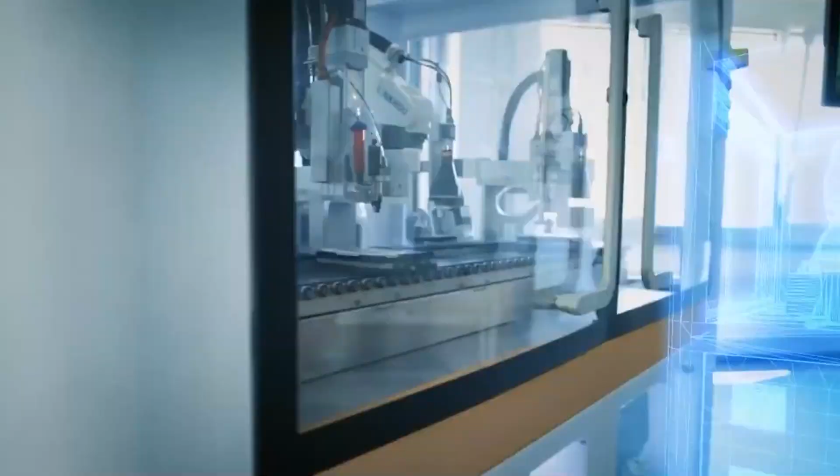Thank you so much for the tour. We can go to the presentation.

Mostly with my experience working with a lot of MSMEs, I have found there are three major challenges which are commonly observed when MSME has to adopt a new technology.

The first challenge is time. There are a lot of things which are parallelly going on, a lot of things which a single leadership or very few people have to handle. So time is a big constraint to look at these technologies for their future progression. That is one area of concern. Second is the knowledge and understanding.

We are trying to enter a new technology. We want to introduce it in our present processes and present production line. We may not be knowing the entire knowledge about how to apply it. So that is another challenge why we normally keep it not in our priority list, but a little back.

And the third challenge which we are finding is the cost. When you apply such technologies, you always have this perception of how this initial cost of investment will help you. So we have done certain case studies in the past where we engaged MSMEs to do certain solutions through us, and we could see there is a lot of benefit they got after applying the technology.

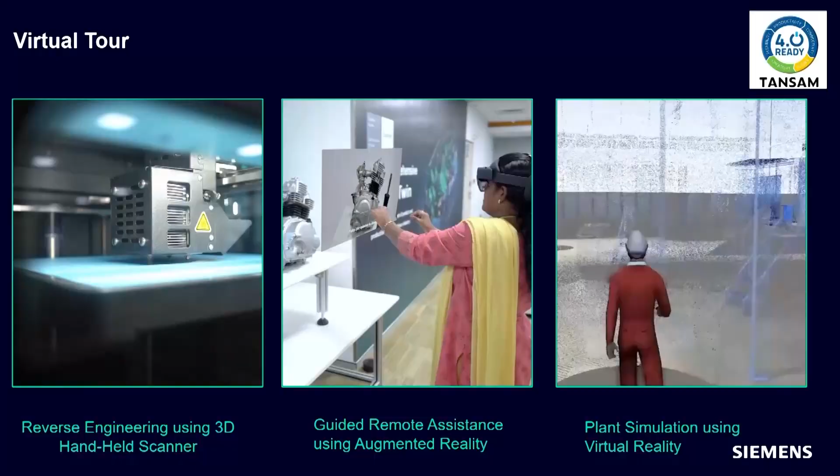This is our reverse engineering infrastructure. I've shown in the video we have a metal printer. I'll take you in detail for that. We have infrastructure on augmented reality.

This has a major impact when you are bringing a machine from outside, but then you are burdened with the AMC cost. So that AMC, if you can work out some solution where you can be guided to do maintenance, whether a person knows that technology or not, you can apply such solutions in your factories and it can reduce your existing cost of AMCs.

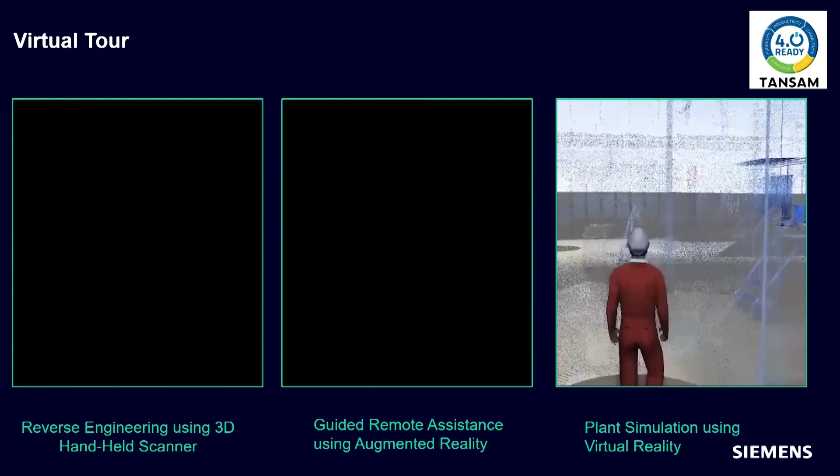And then you have something called plant simulation. Your new projects, your existing plants can be brought to a simulated environment and can be then optimized.

This is the infrastructure which we have from Siemens, and this is first of its kind. It is the first industry Center of Excellence. I have been heading other centers which are more academic in nature, but this is the first industry center of excellence because of the capabilities it owns.

Before this, they only had this in China. Now it is the first one located very near to you. It is in TIDEL Park. What we have as a mandate with us, I must share that with you.

One is that we are enabling, as in we are bringing the infrastructure to you. If you want to set up some infrastructure, you can take help of TANSAM and we can get that infrastructure done for you if you are new to that. Second, we are helping you in managing those infrastructures also. We are setting up spokes.

Spoke is where TANSAM acts as a hub, and we can partner with you to implement that infrastructure within industry. Then we are also your implementation partner.

We are helping those programs which are on Industry 4.0. We are training people on 4.0 programs. I have been meeting people who have this challenge that although they are interested, they don't know how to use it. So we can give you some skill development around it.

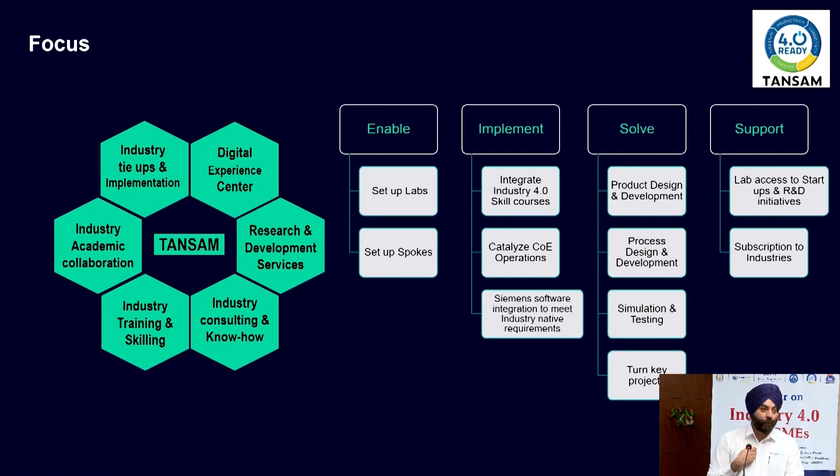We have that infrastructure to support. We are also catalyzing your COE operations. If you already have a center of excellence there and you are not able to operate it, we can support you there also. We can also support you if you have Siemens infrastructure anywhere, but you are not able to integrate it with your native requirements, we can do that also for you.

So these are all the solutions you can get through TANSAM. We can provide you solutions on product design and development.

Any requirement you have on product design development, you can give it to our team. We have a resource team who is already experienced in industry and who understand these tools, and they can give you solutions around it. We can also support you with any process design and development.

If you are new to any process, you want to introduce any process, you want to automate any process, you want to simulate any process, we can help you achieve that also.

We can do any simulation and testing for you. If you want to monitor any structural analysis, you want to perform any fluid flow analysis, you want to perform any particular testing, we can do it by using these softwares.

We can also help you with solutions towards turnkey projects. You have no idea about how to implement, but you want to implement, you give the entire project to us, we'll help you implement. So that is how we are hand-holding all the industries.

In addition to that, we are also supporting in the way we are doing a lot of R&D activities, and we have started giving lab access to each one of you. If you just want to use the software, you know the software, you can come to us, you can use the software. We can actually give you a per hour kind of usage module for yourself.

So these are the basic understandings with which we are coming to industry. Subscription model is also there. There's an industry who wants to sit there, work for 3 months or 5 months and wants to protect their IPR also. We'll have a sign up with them where we can give you a subscription where your people can sit and work on it.

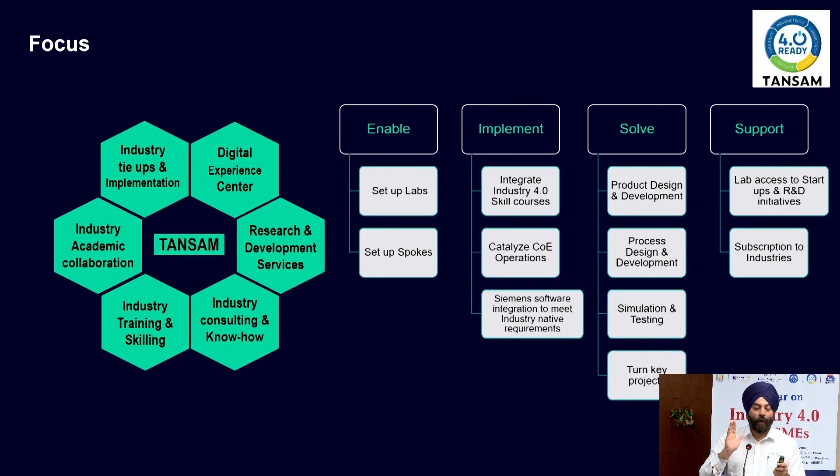All these are possible at TANSAM. What we have as infrastructure, we have 7 centers in that facility. We have named it to meet the domain requirement, Innovative Manufacturing Center. This has largely reverse engineering you can do through this.

Yesterday I was visited by an industry who has a small part which they are importing from China. But now that small part, because of the pandemic situation there, they are not getting it and their production is held up. But there is no manufacturing done in India. They wanted that product entirely to be developed in India.

Mostly they need 30,000 such parts in a month. So what we have done is we are now reverse engineering it. We are making a model from it and we are giving them a prototype and then we'll give them product drawings. That small work will enable them.

That small work will enable them to get 30,000 parts in a month. They'll be able to get it manufactured through India. So that is what innovative manufacturing is all about.

We have a 3D metal printer also. You can print stainless steel at our center. You can print Inconel. You can print tool steel. You can also print copper.

So all these things, you need not do a prototyping in plastic or any other composite. You can print steel directly. So like that, we have that infrastructure.

The second infrastructure we have is the smart factory center, where if you are looking for automation, you need to understand how robotic and automation work. We will show you certain prototypes we are working upon, cobots and robots, which are applied in the day-to-day manufacturing line for their requirements.

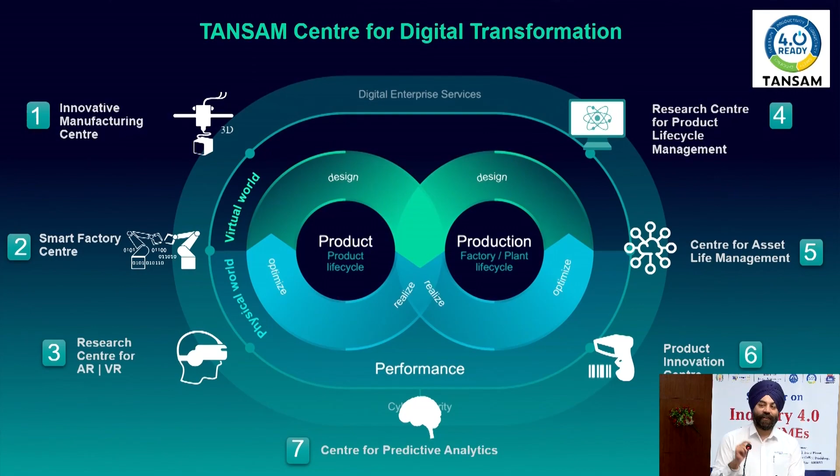Augmented reality has a lot of applications when it comes to remote guidance of any maintenance to be done, any work to be done. Also, you can have an indoor navigation system, like you have an industry and you want a person to move in that and go to each area of your industry.

You can have an indoor navigation system, which we have developed an application for. It is available at a very nominal cost. Likewise, there are a number of applications of augmented reality. Another application you can have is virtual reality, where you can add immersive experience.

Say you have a clientele based out in UK and you want to sell your product, but you cannot take the product and go to UK to market it. What you can do is give them an immersive experience. You create the entire plant process or a model in virtual reality and show them through that, highlighting all the good parts you have. Our team will help you generate those applications as per your requirement. This is that center's capability.

In addition, we have a research center on product lifecycle management. Every product has a life when it enters the industry - you come in as raw material and go out as an end product. You do some CAD designing, then certain processes, then it moves in the plant, then testing happens. Throughout the entire lifecycle there are many softwares and applications involved. Even traceability is a factor - sometimes the line is big and you want to trace what went wrong. All of that you can get through the center, and we help you apply it to your real-time requirements.

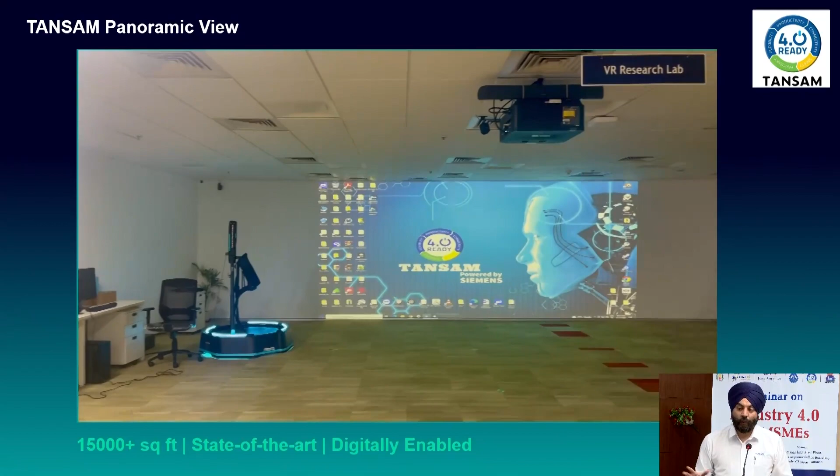This is a small panoramic view I wanted to give just to give you the idea. This is our VR area, where we apply all the applications related to virtual reality. You can bring your clients here, show them what you are doing, and get new orders from here. Then this is our innovation manufacturing area, and behind that is a robotic smart factory area. On the right side we have the AR area.

Then there is a digital lab where we have 100+ systems with all the software enabled, whatever you want - even electronic chip testing, circuit creation and testing, and PCB board optimization, we have software available. You will be amazed to see it. I'd like to invite all of you to come to TANSAM and see the kind of infrastructure we have - it's a world-class infrastructure meant for MSMEs. You come there, use it, and try to build up your own digital enterprise.

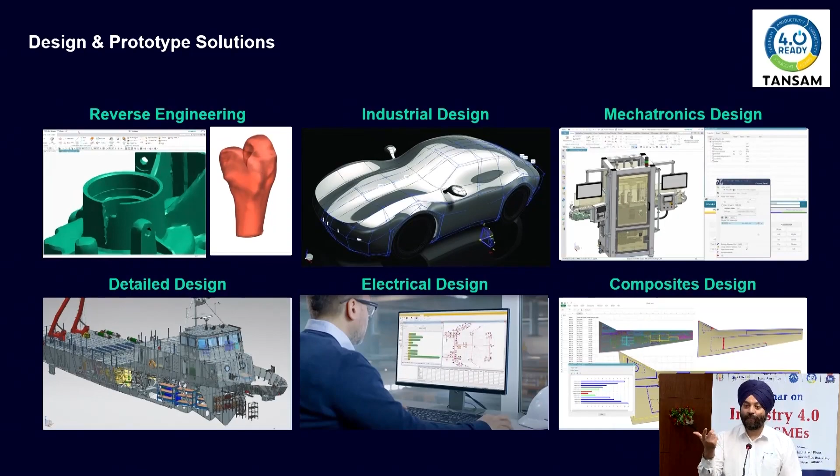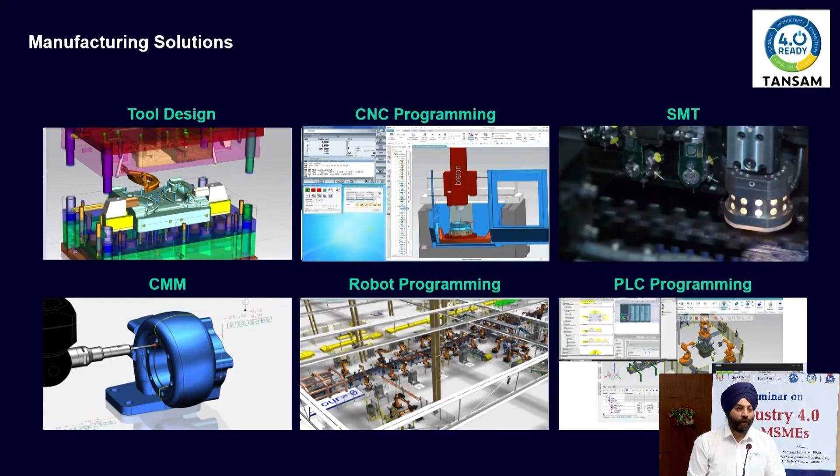This is our reception, conference and training rooms, discussion areas, and meeting rooms, and we have some labs working with us. I've already referred to reverse engineering - there are people here who have given me tasks for small projects on reverse engineering, and I have done that for them, they already know. Then industrial designs, mechatronic designs, detailed designs, electrical designs - all of these you can get through us. Tool designs, CNC programming, SMT, CMM, simulation, robot programming, PLC - these terms are not new to you, I just wanted you to know you can get this from us.

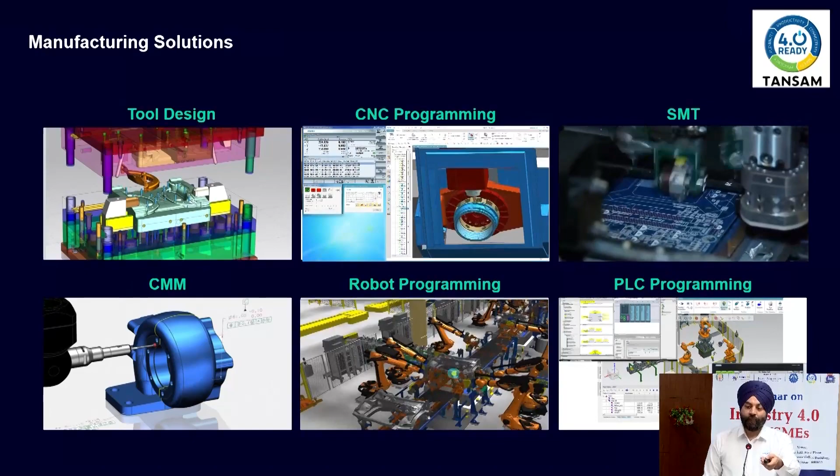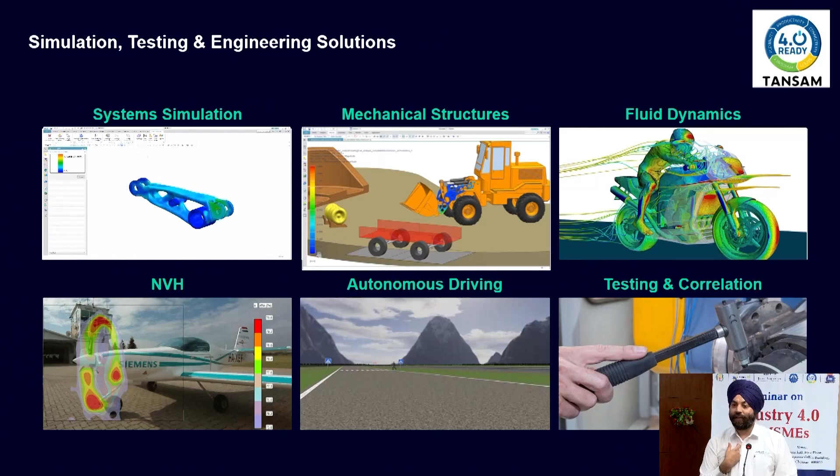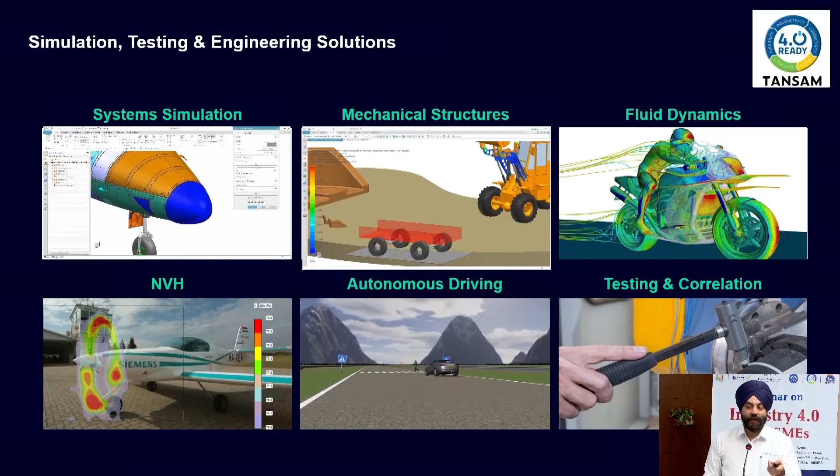System simulation is very interesting. I was talking to some people in Trichy and they said this is a huge requirement with them. We need to simulate certain fluid flow dynamics, check requirements in aerospace and defense. If you're dealing with such parts, structural analysis is very much required sometimes, so you need to check how mechanical structures are working. Fluid dynamics you can check, NVH, autonomous driving, process simulation - even your process can be simulated.

I worked for an engineering company where we simulated one process. We commonized their jigs - they were doing manual clamping, and we commonized the jigs instead. The impact: when done manually, an operator worked 2.5 hours every day, and the machine's output was 35 units a day, which they were exporting to Switzerland. After commonizing the jigs, they were able to do 42 machines a day. Look at the impact - every day they're able to manufacture 7 new machines. That's the impact of that one commonization we did for them.

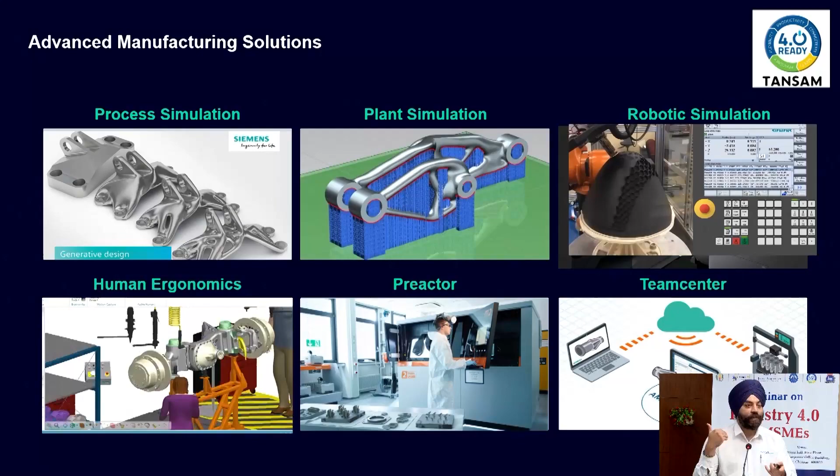This is where Industry 4.0 will excite you. It has a lot of features you should adopt. Initially, you cultivate some small problems, bring them to us, and we'll try to resolve them, and later you will adopt fully. We are very sure about it. And your competition should also know that you are going towards a digital enterprise - that's the edge you are making for yourself.

Product lifecycle management, application lifecycle management, product cost management - all that we can take care of. IoT devices, if you're looking at such solutions on cloud, we have that infrastructure. Look at all the required solutions you need on the digital enterprise. Siemens has a history in doing that - we offer this to many manufacturing units. All the big giants have Siemens infrastructure available with them. Through this Center of Excellence, we are trying to bring that to all those industries which otherwise find these solutions very expensive, but you can have it done from the Center of Excellence.

You can do mobile viewing, AR content creation - all this you can do, and also virtual reality. If you are making a car or a part, you bring it to a platform where you can show how it's working. You can simulate your existing kinematics in that, and you can show it.

We did one project on a ship - testing how pollutants from the ship are moving out of a chimney and what path they follow. To do that, we engaged our product, Star CCM Plus. Once we performed the analysis, we wanted to bring it to VR so people know how it's following, and it's like validating what you are doing.

For any defense work you're taking up, you need a lot of validation. I did projects for DRDO where I know how deeply they want to go into what you're doing before they actually consider you as a vendor. VR is applied at most of these places.

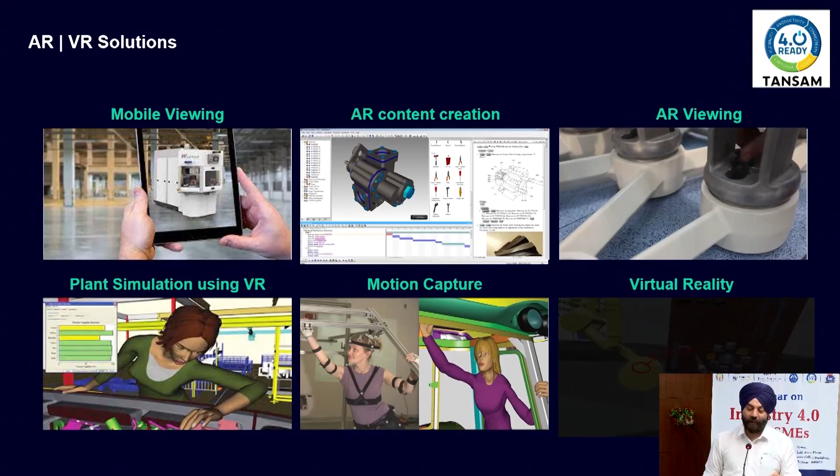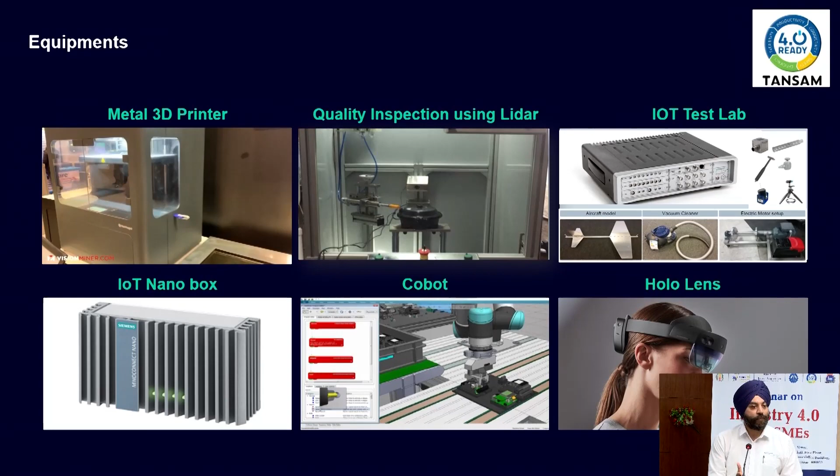What I reiterate is we have a metal printer, we have an inspection system using LiDAR. In case you're doing part inspections manually, with 7 data points or 17 or 1000 data points to inspect, we can give you a solution where this is inspected using a visual sensor. You just need to give us the ideal part, we'll have that comparison, and you can put it on your conveyor belt where you're doing this inspection. The sensors can be placed so they inspect the part and give you a report. All that can be done by engaging TANSAM infrastructure.

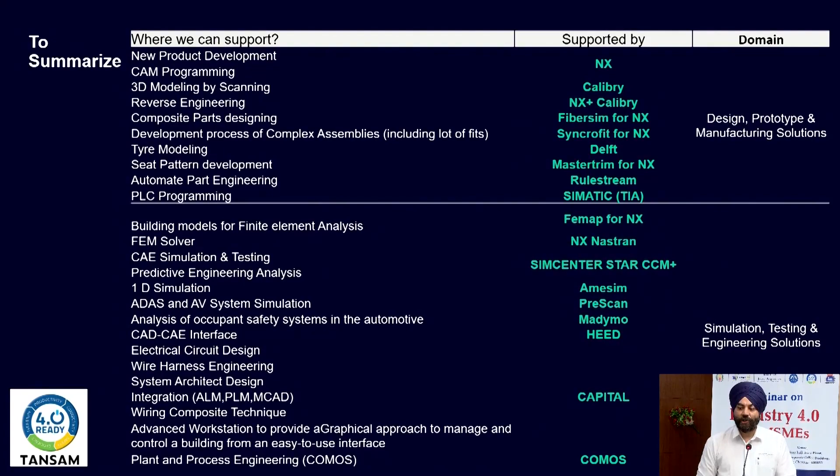Just to summarize: on design, prototype and manufacturing solutions, we give you industry-required solutions. We offer simulation, testing and engineering solutions. We offer advanced manufacturing solutions. We offer lifecycle management solutions. We offer IoT solutions. We offer AR solutions. We offer VR solutions. And in addition, we have some equipment.